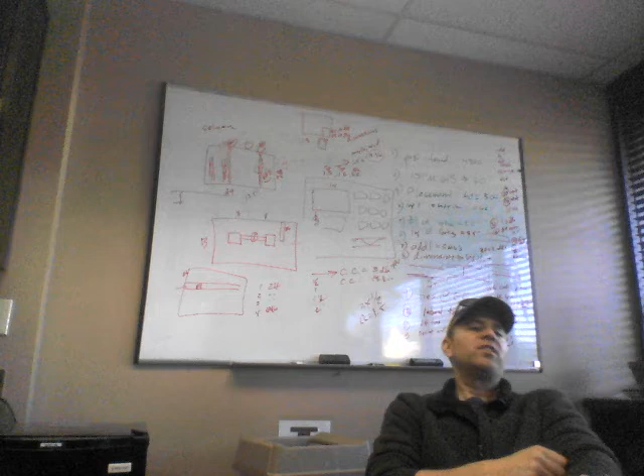Okay, I went and took the test on Friday. This is the second time that I took it. The first time I took it, it was more so to figure out how the technology worked, just a general thing, I wanted to know what was going on with it. I took it in 45 minutes and I was out of there.

This last time I took it, I really sat there and tried to remember all the questions. I took time to figure out what was up with each one of them. I went through the entire test 3 or 4 times and remembered everything. I wrote everything down on notes, so I had a visual imprint of it, so when we came back in to talk about it, I would remember.

But most importantly, when the test ended, I waved to the person to come over. I said, I'm done, and for them to shut off my test. And they're like, you have to take the survey. I said, I've done this test 30 times, I've tested in here so many times, you don't need to know my opinion anymore, I'm sure you'll be okay without it. She's like, no, you have to do it. I'm like, fine, and I just clicked right through it.

There's 12 questions. I didn't answer any of them, just clicked right through it. And a little screen popped up and it said test administrator score, and this all happened in less than a second. It goes 100%, and then the screen disappeared. So you can see it graded it real quick, and because I'd overloaded the system with all the clicks, it showed it on the screen instead of what probably in other instances would be a blip that nobody would see. It popped up there.

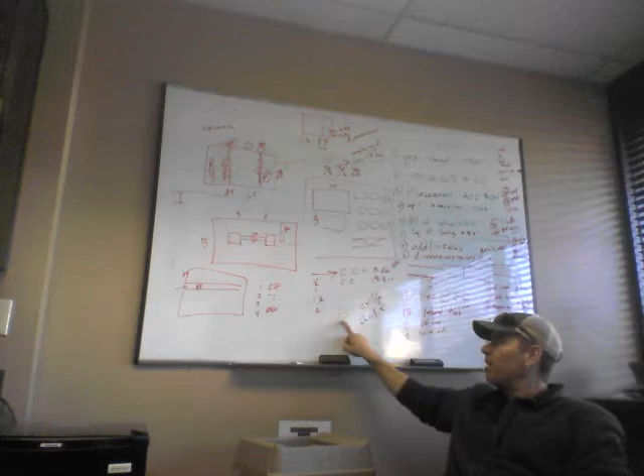Since we're video capturing this, I'll reiterate: remember when you pop up your exhibit screen, you can grab it from the top, move it down, look at your question, put it back, go down, put it back.

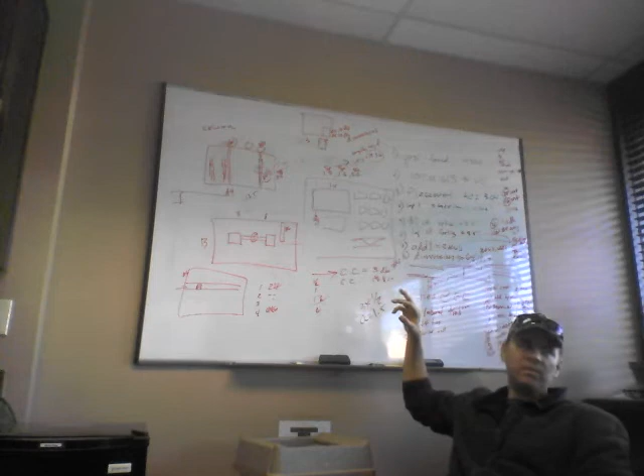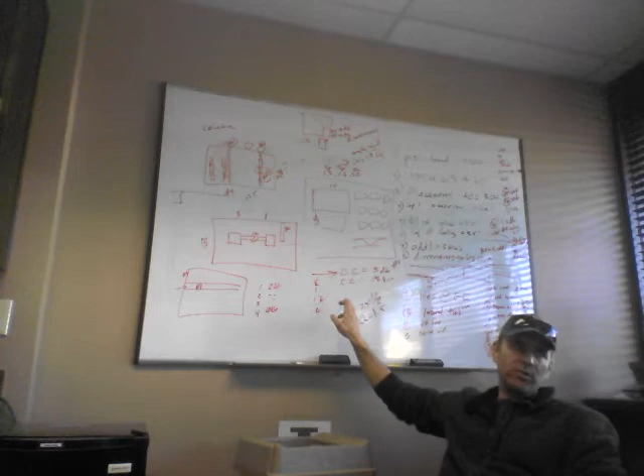The one thing I realized in this last test after doing the exhibit tutorial is that once you pop your exhibit up, if you hit enter, it makes the exhibit disappear. That was frustrating because you had to move the exhibit out of the way and click zoom or whatever. Now you can pop your exhibit up, and if you want to see the question, click enter, and the exhibit goes away. Between those two things, I was really able to cut through the technology portion of this very quickly.

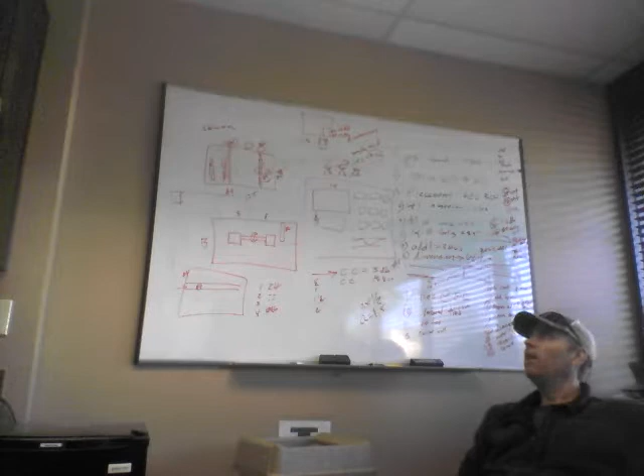That being said, the technology portion of this shouldn't be difficult in any way. What I think we discovered last time was that there are probably 6 or 7 questions we'll call booby-trapped, that we now know the right answers to if we get the same test next time. We can probably focus on those more than anything since we know the right answer to them.

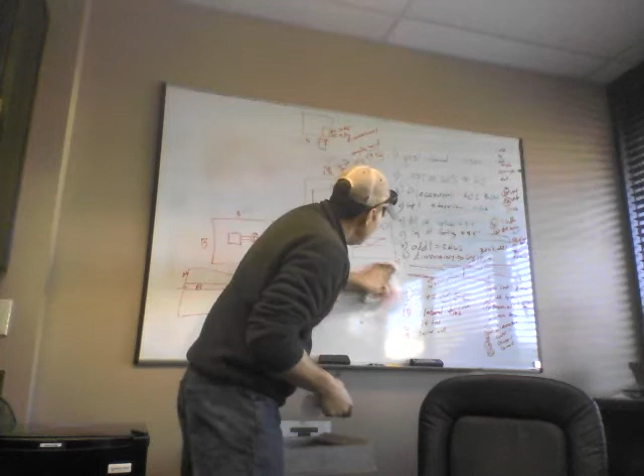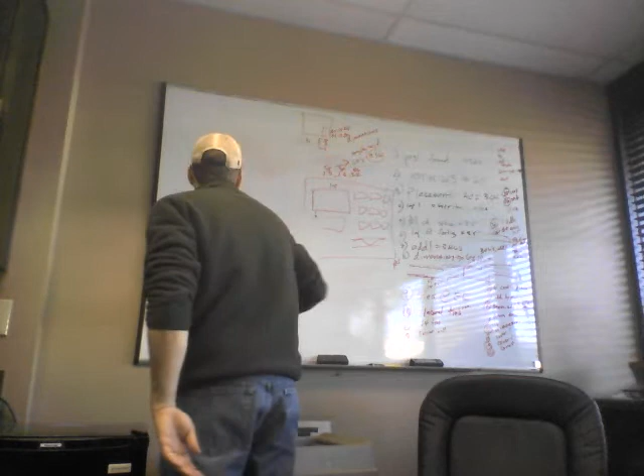Have you guys been taking it at the same place? I always take mine at SAC, Watt and Manlove, Cal Center Drive. I did Roseville the first time. If you do 8 a.m. at that one and you're there by 7:30, or 7:15, you'll be the first at the front door, because they don't open the doors till 7:30, so you can be the first one taking the test that day. I hate when there's a line of 90 people trying to cram in there and study. Well, I've been taking mine the same place, mine's in Sac too, but it's off like Gateway or something, that's the one I did. Gate Oaks, or Gate Oak something Parkway or something?

Yeah, yeah, why does my fucking computer always want to update?

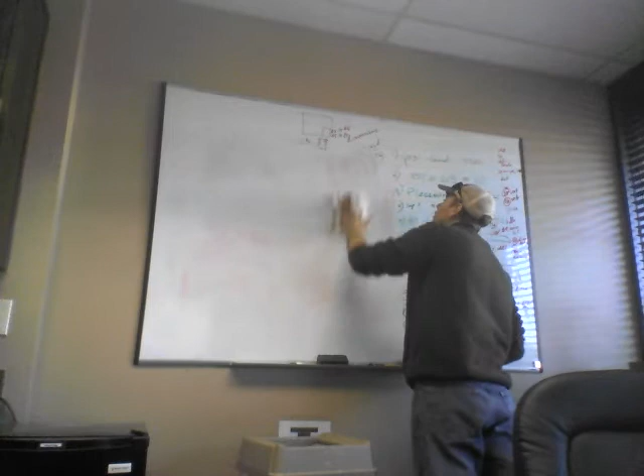Okay, so this test is 30 questions. They're in the bottom, go over here, other side, bottom right.

Okay, so, excuse me, we'll take it from the top. The general notes questions on this test - the first one asked what the required PSI of the concrete in foundations was. That was no harder than going to the general notes and seeing that it is 4,500 PSI.

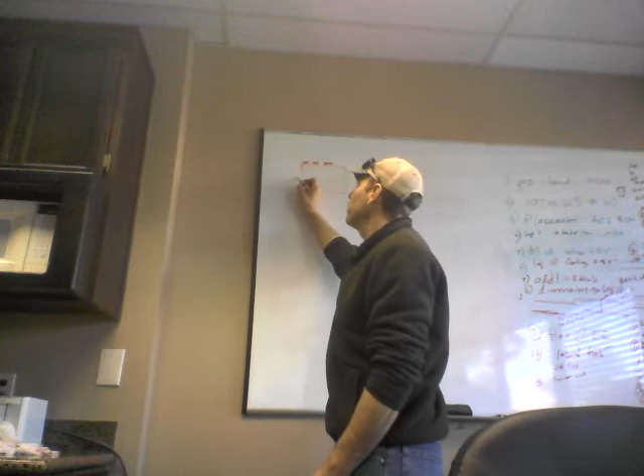The lap splice schedule requires you to know what PSI the concrete is to get your lap splice length. In this case, it asked for a cast in place wall. We go to our general notes and see the cast in place wall was 5,000 PSI, and we know we're dealing with a number 8 bar. So you go there to there.

But there's a couple tricky parts about this that make it a little extra complicated. One of them is they give you a tension development schedule right above it on the same page, so you've got to make sure you're dealing with the lap schedule, not the development schedule above.

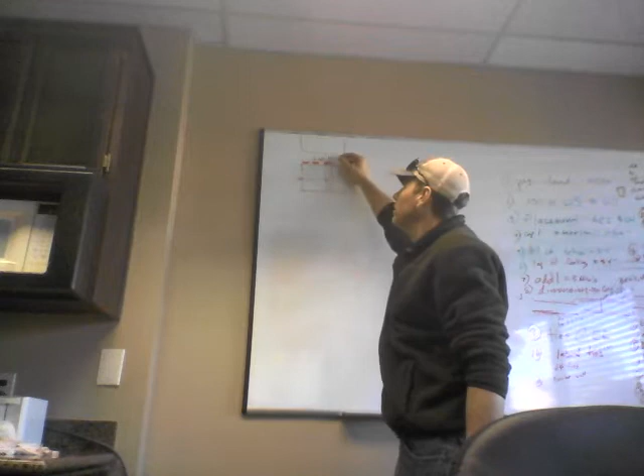And secondly, it breaks this into two numbers. It gives you top bar, and I think they call it other - I don't know if they call it bottom bar or other. Your inclination is to go spend a bunch of time figuring out what the top bar is and what the bottom bar is and whatever. But what you should notice is...

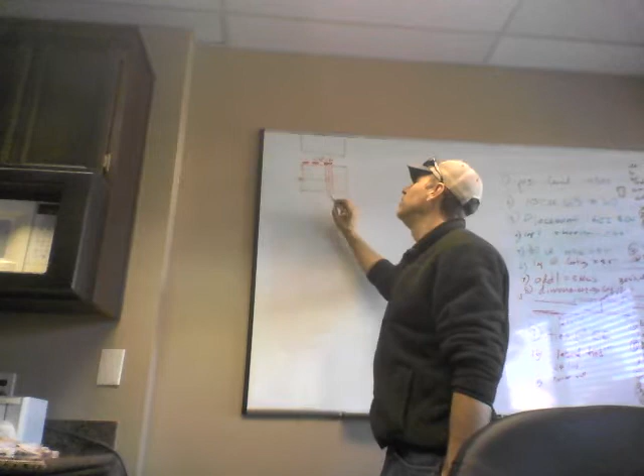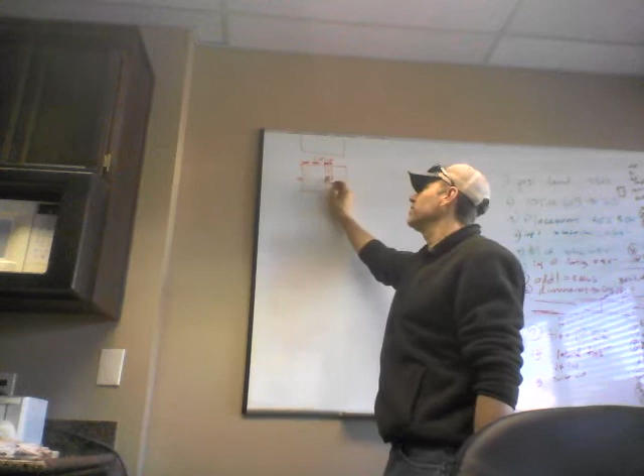...of your answers, only this one isn't your answer anyway, so it can't be the top bar. It has to be the other one, which I think was 62 inches. So you don't have to spend a bunch of time figuring out which is the top bar and which is the bottom bar. Just look at the choices you're given on your answer sheet and what is actually in this section. I think it was 62 inches, and you can answer it that way.

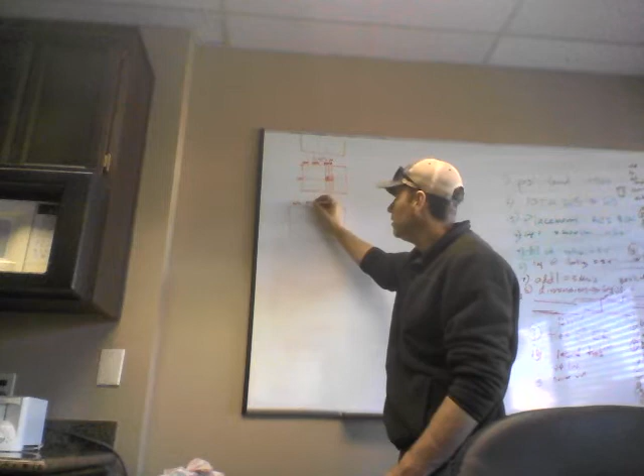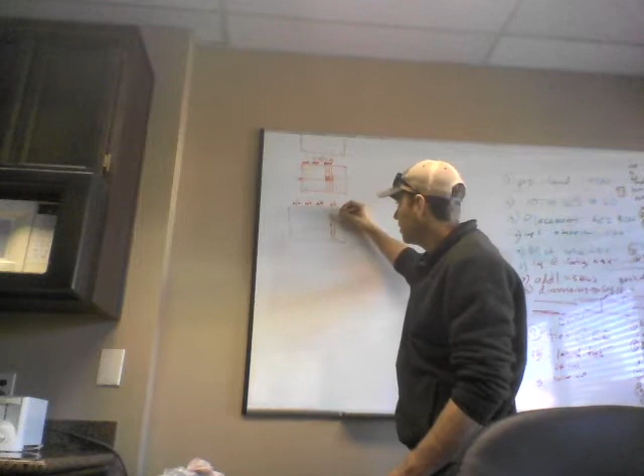Another lap splice question was, what is the required lap splice length in the vertical steel in the column at B11 on the second floor? Something like that. And what we're going to want to do to answer the column lap splice question is get the column schedule open. The column schedule gives you a number of locations, and it draws pictures of columns right there, showing how they lap and what the steel is at each of the different tiers - this is the fourth floor, this is the third floor, this is the second floor, this is whatever.

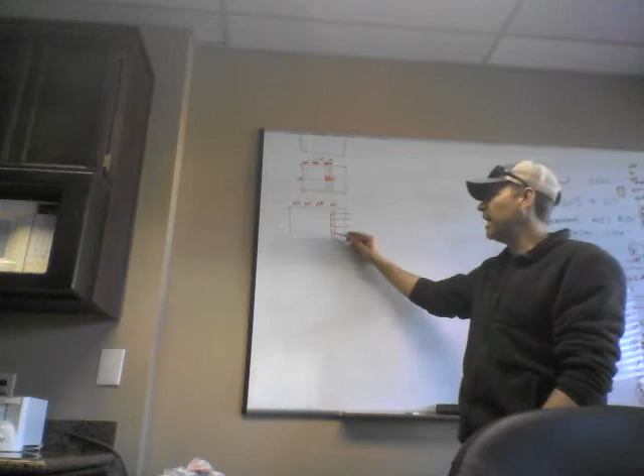Again, our inclination is to figure out what size the steel is and then go to a lap schedule, but that's not how you answer this one. If you notice the very far right of the page, it says number 9's lap at like 6'2", and number 11's lap at 8'5".

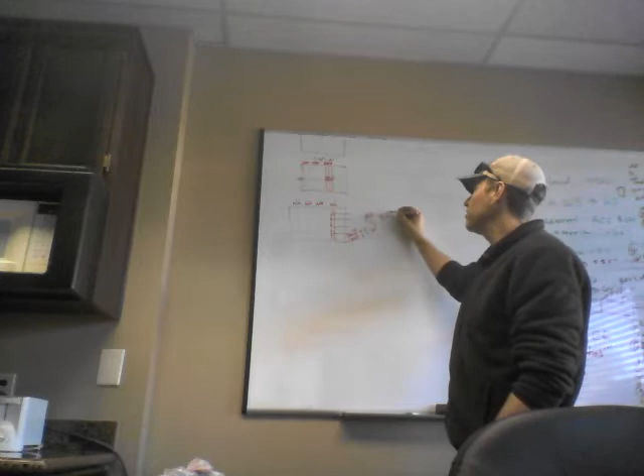You see really quickly that the kind of bars we're dealing with in column B4, whatever it was, are number 11's. You see that number 11's lap at 8'5", and your correct answer for that lap question is going to be 8'5". But the trick to this is make sure you scroll all the way down to the bottom right-hand corner of your page to pick up this little lap note.

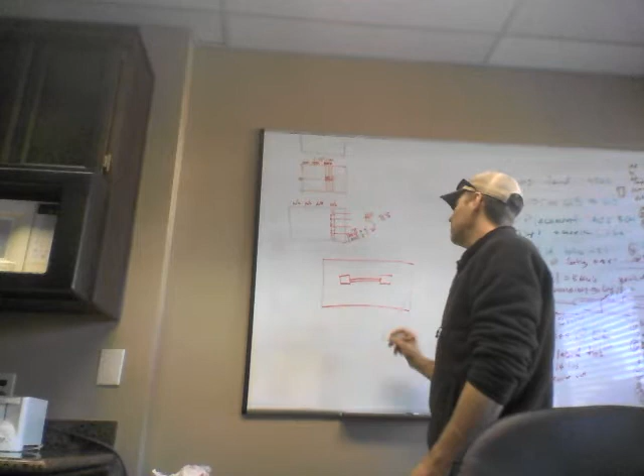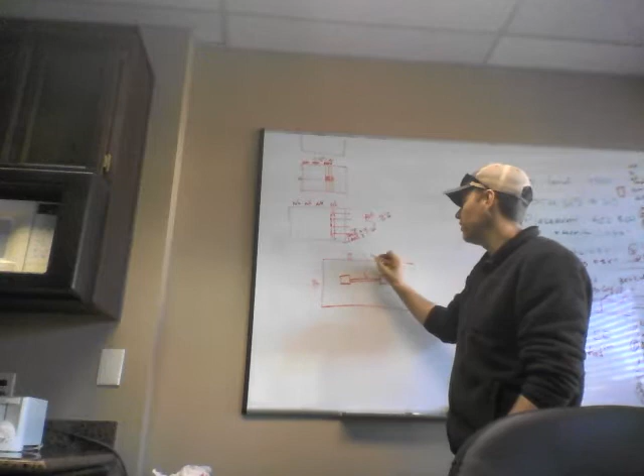The last lap question was - they give you a foundation plan, and I think there's a shear wall in the middle of the building. This is the footing for it. And it says, what is the required lap in the bottom reinforcing steel in the footing on B line between 8 and 11? Something like that, I forget, or it was like 5 and 8 or something. It said, what is the required lap in the reinforcing steel in this? And again, our inclination is to figure out what the steel is and go back to a schedule.

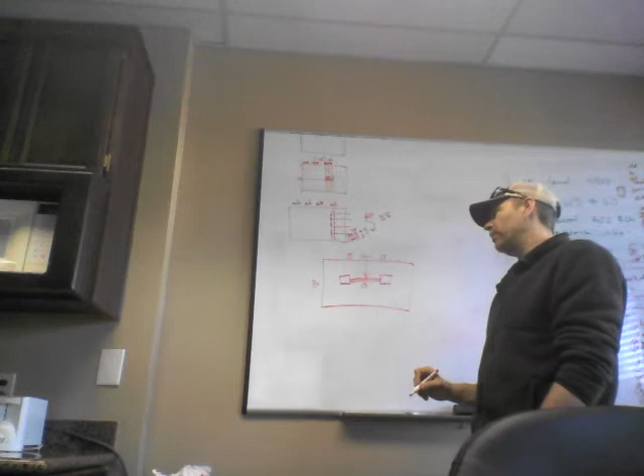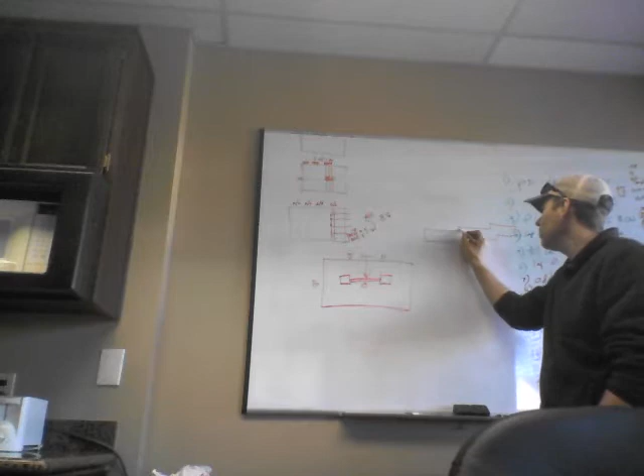But in this particular instance, there's a little elevation marker right there, and it turns that footing up to where we can see it like this. It is a stepped footing, and I think it's a shear wall footing, but I don't remember. You see the bottom steel, you see the top steel. I think they maybe show you some transition bars, something like that.

But there's a little note right here that says lap 8'5", and that's how you answer that question. So that thing is a cut right there? It's a cut, it's an elevation view. It flips the view up this way so you can see a sideways of it. And if you scour all the way around it, down on the bottom left, there's a little lap note, and you pick it up right there.

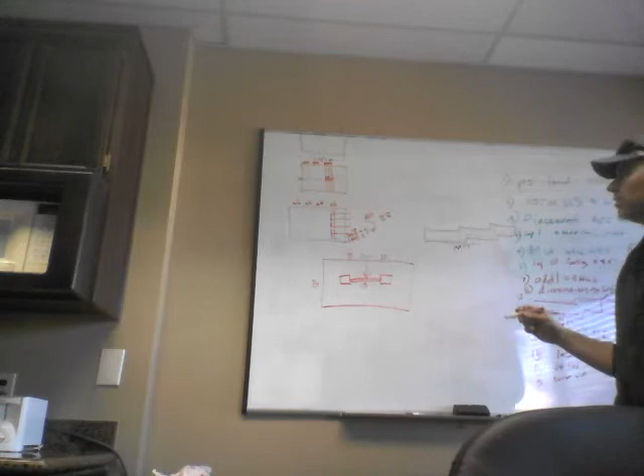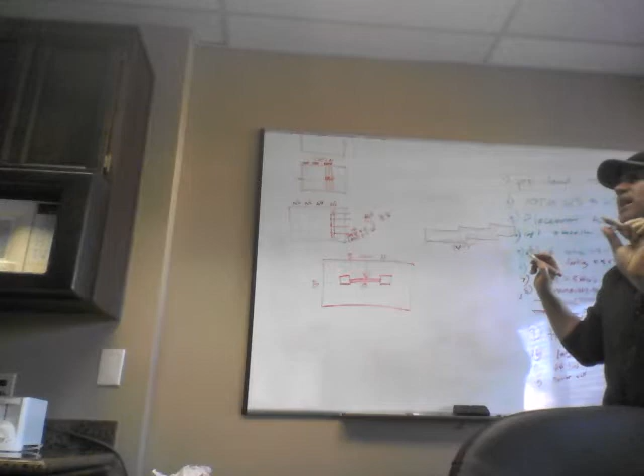They go back to this same shear wall footing numerous times in the test. One of the questions asked what is the required additional steel, I think this is the one that says the length. It says either what is the size and the length, or what is the size, and I think it's what is the size and the length. Well, that's another one.

An additional steel question refers you to this footing again. It says, what is the size of the additional steel at footing B between 8 and 11? You do the same thing, pull up the elevation, look at the side view, and it shows number 5s, and there's a little note that says ADDL, additional, like 3 number 6s. The answers are what is the additional steel: 3 number 6s, 4 number 4s, whatever, and the answer is 3 number 6s.

But while on this question, that made me remember another one. We'll call this question 28. It asks how long the bottom reinforcement in this footing is, between B8 to 9. So it gives you one section from here to here, and asks how long the bottom reinforcement is.

The way you figure this out is that the steel is identified down here. It's going to say number 5 at 16, number 5 by 14 feet at 16. If you don't realize that this X tells you how long it is, by 14 feet, you'll get it wrong. I think in this instance it was actually like 42, no it wasn't 42, I forget what it was. But it asks how long the bottom bars are, and you're looking for the X symbol because that tells you how long something is. That's another question you're going to get about this particular footing, we'll call that 28, length of bottom bars.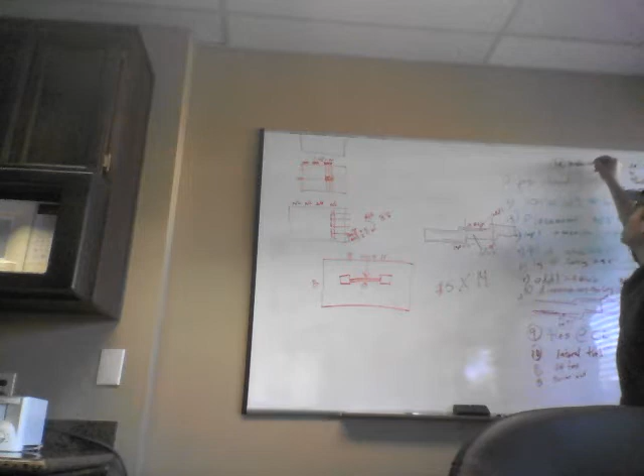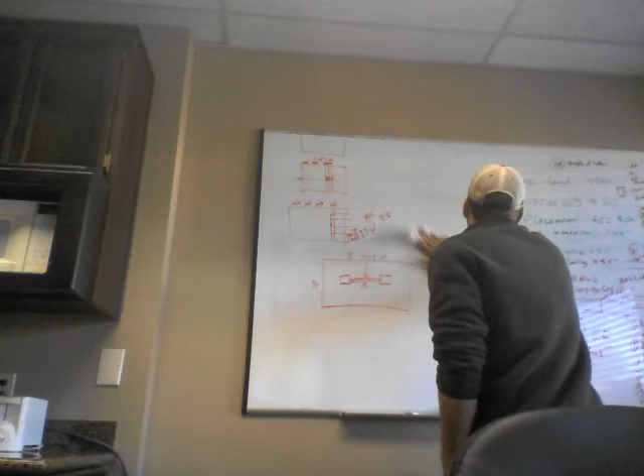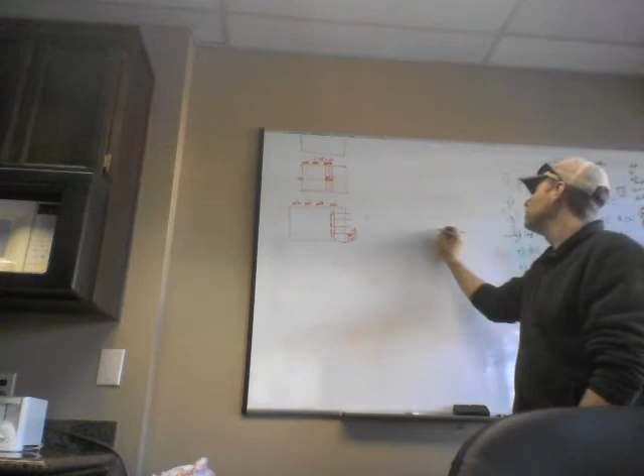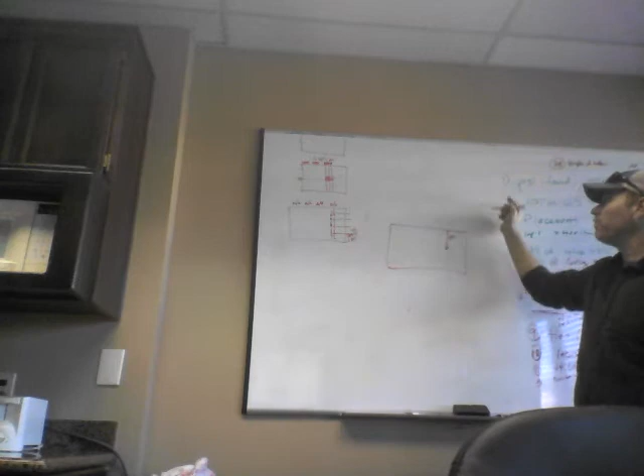We've talked about this at length already, but it came up on the test, so we'll do it again. It's going to give you a framing plan and ask about a beam from here to here, and say what is the tie spacing at each end of this beam? This beam is a PG1, we'll say. Obviously one of the other pages they give you is your beam schedule.

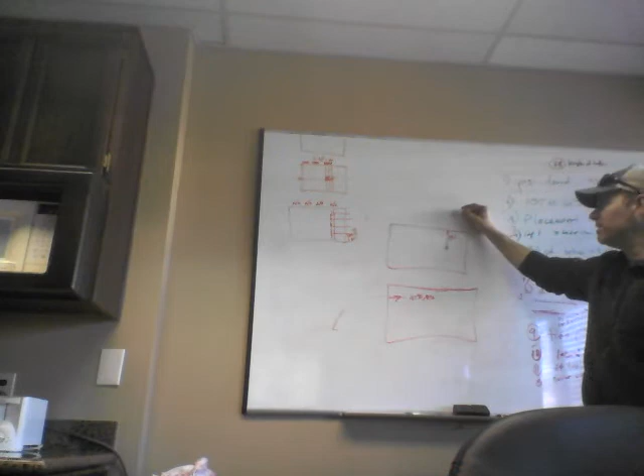You go to the beam schedule, and basically you go to PG1. I think it says it right there. It's like 1 at 3 each end, 1 at 3, 4 at 6, blah blah blah. You just correlate that right back to the answers they give you. It's just that easy, there was nothing difficult about it. The only thing you need to know is EE means each end. If you're not able to figure that much out, you might get that question wrong.

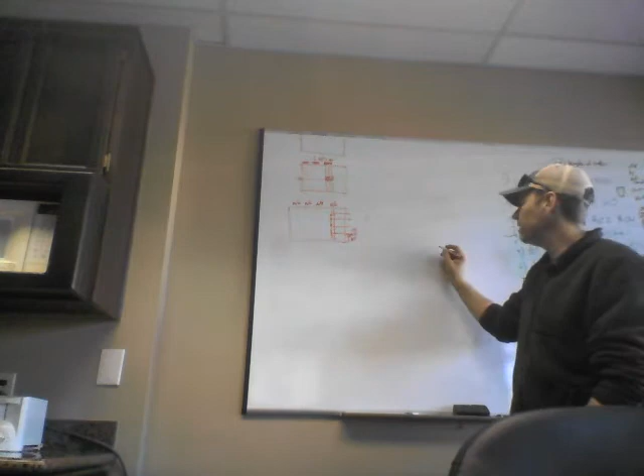Lateral column ties. What was the lateral column ties about? Okay, that one, all right. So you may remember we did this question before, where it's going to say the column at B4 between the 8th and the 9th level has how many closed and how many cross ties.

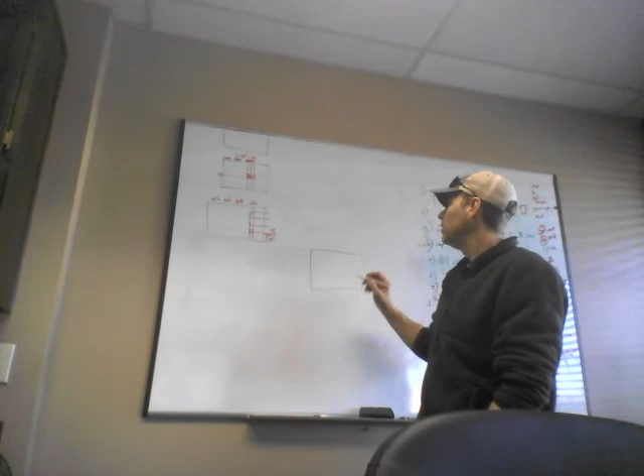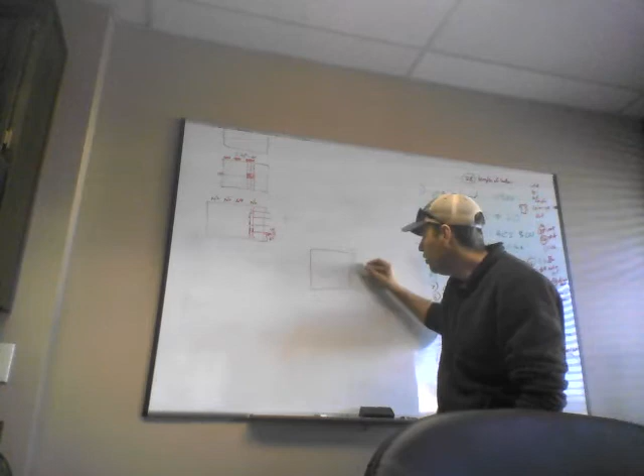What you have to do is go to B4 in the column schedule. Column schedule is going to have a column right here, B4, and there's a little note on the side that says, for ties, go to 12 on S5.1. Cool, we know the tie spacing for this column is 12 on S5.1. You go to 5.1, and it's got your sheet like this, with all these cut views of every different column type. This one has circular ties, this one has a closed tie and a cross tie, this one has whatever whatever.

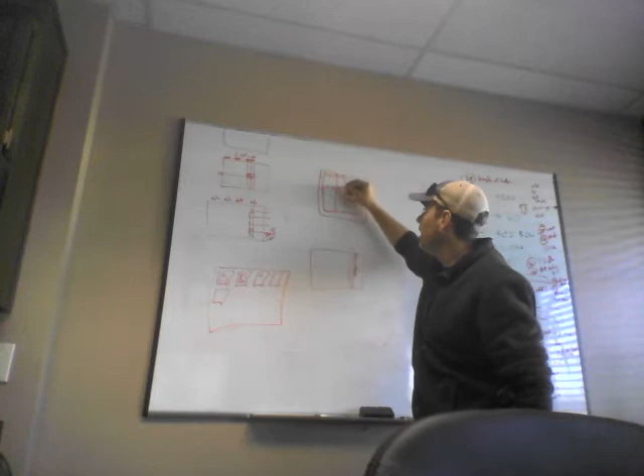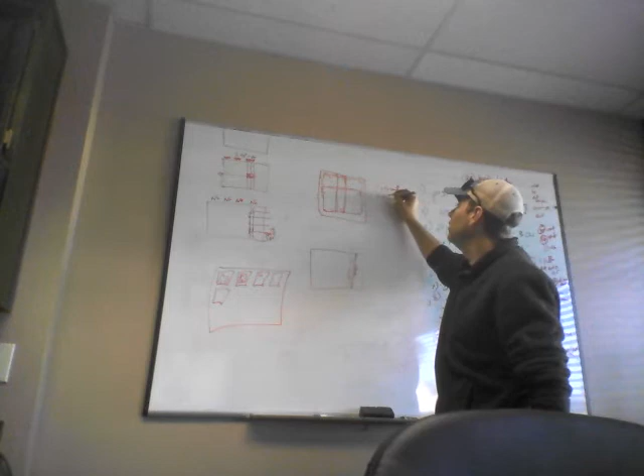Well, we get to our picture, and it's a column, 1, 2, 3, like that, like that. It's got the closed tie. It's got a cross tie, a cross tie, a cross tie. It's got them going the opposite direction like this. And the picture becomes muddled because these are all on top of each other. Your choices are 1 closed, 2 closed; 1 closed and 3 cross; 1 closed and 4 cross. I think there might even be another one right there.

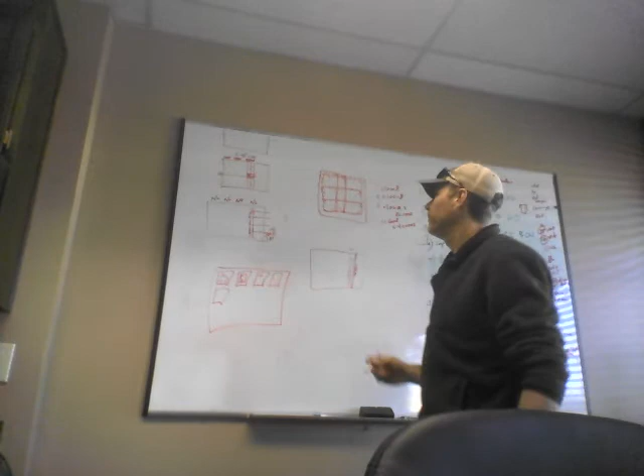And what's the answer? One closed and 4 cross, that's what I thought the first time, but I took extra time the second time to figure it out. On my second test, it actually was like this, and that's what made me realize I got it wrong the first time. It would have been 5, but 5 wasn't an option.

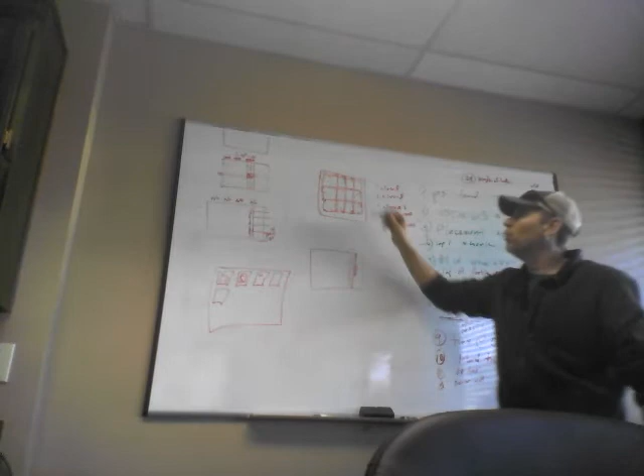1 closed, 1, 2, 3, 4, 5 cross. I was sitting there going, it's impossible, you can't. And then I realized it didn't.

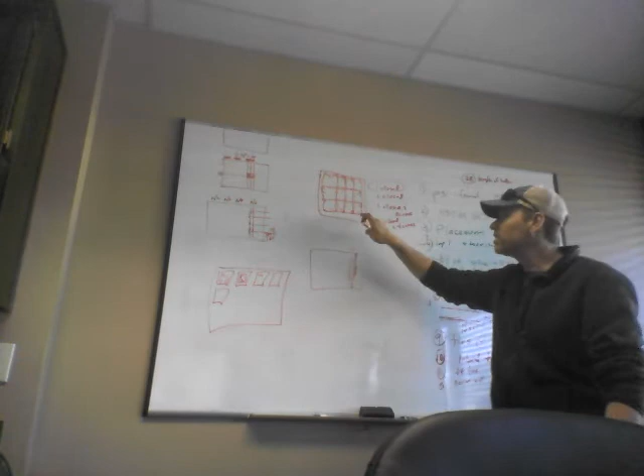The right answer isn't here. What is the best answer? What's the only thing we know for sure? Was the 1 closed. Right, it's BS, but that is what it is. So anyways, when you get to this one, you don't have to waste too much time on it. At least in the test that I got, the question I got, it was 1 closed.

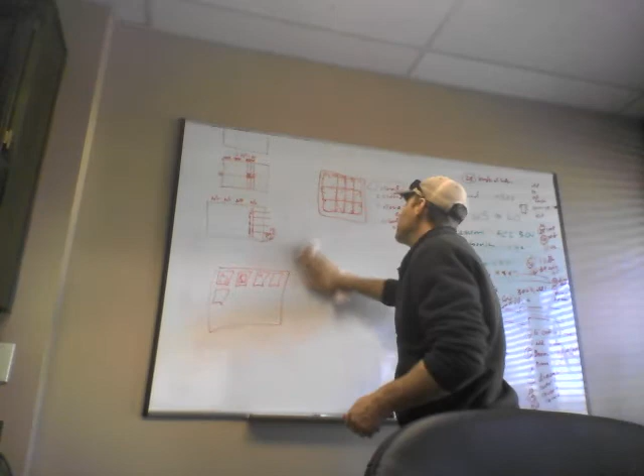Okay, on that note, another tricky one about this was it asked you what size ties exist in the column at B2, at level 3 to 4, whatever it was. What size ties?

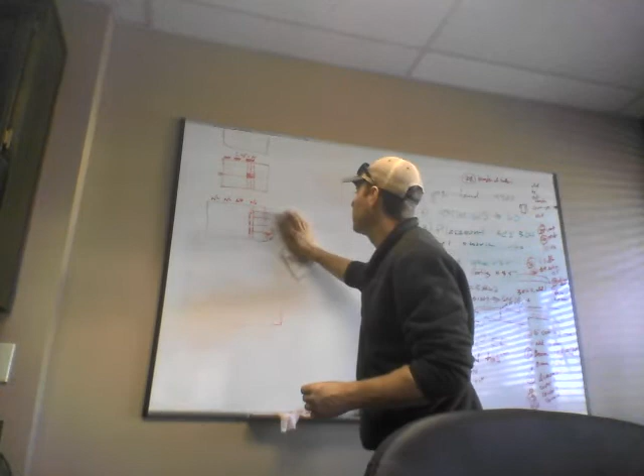And it gives you 2 sheets that have nothing to do with the question they asked you. In this particular test, this question was blown. They did not give you the right sheets for it. I had to go back to a previous question, pull up the column schedule. It was not there. I had to pull up the lateral tie schedule,

which I just happened across later in the test. And the lateral tie schedule, which is the one that has all the pictures of the ties, right here, was a picture of a column in its typical layout. And there was a little note to the side that said, for number 11 bars, use number 4 ties. For number 9 bars, use number 3 ties. Once I saw that, I was able to answer two or so questions based on that.

But what the question asked you was, at the B2 column, between here and here, what size ties does it get? Well, you see that there are number 11 bars up here in this column. You see the number 11 bars get number 4 ties. You go there, you choose number 4, and it's as simple as that.

Wait, can you repeat that? Okay, we'll go through it one more time.

The question is going to ask you, what size ties are in the B2 column between levels 3 and 4? Something like that, I forget exactly where it asked, but it's going to point to a column and ask what size ties are right there. On my test, they did not give you the right sheets to answer the question from. So I had to go and dig through other questions to pull the sheets out that I needed.

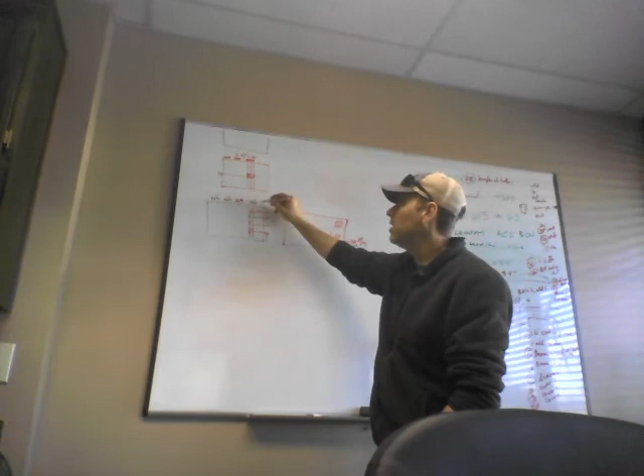Once I did, my first inclination was to go to the column schedule and try to find it right here. There's got to be a note on here that says what size ties there are. There isn't, but it tells you to go to 12 on S5.1 for ties. So you go to 12 on S5.1 and here's your ties.

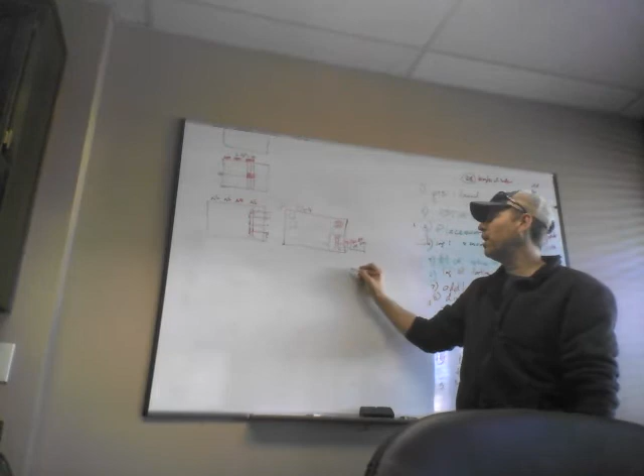If you scroll all the way over to the right, there's this little diagram, and even further to the right, there's this little box that says, for number 11 vertical steel, use number 4 ties. For number 9 vertical steel, use number 3 ties. So it's just a note in the corner. That was how you had to get that one. Yeah.

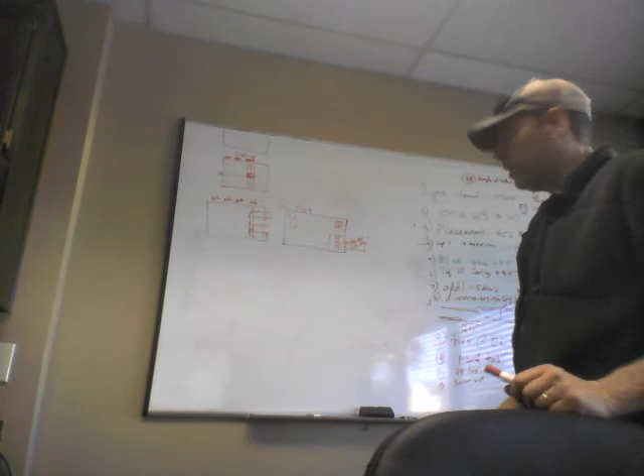All right. Let me see how much time we have on this. We're 24 minutes in. Perfect.

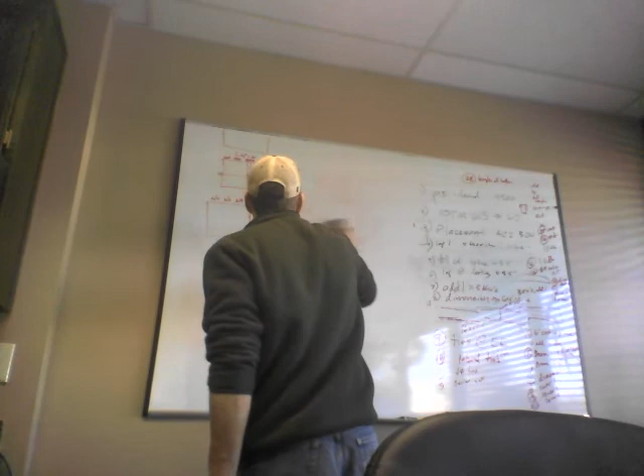Okay, you get 2 questions related to the barrier wall, we'll call it. You have a foundation plan. It's going to say the concrete wall on line A between 5 and 6 has what reinforcing steel in it? And there's a bunch of business going on in here, a bunch of this and that and this and that. It's kind of hard to tell what's what from this view. It gives you a couple cuts though, and obviously we go to the cuts and we see what we got.

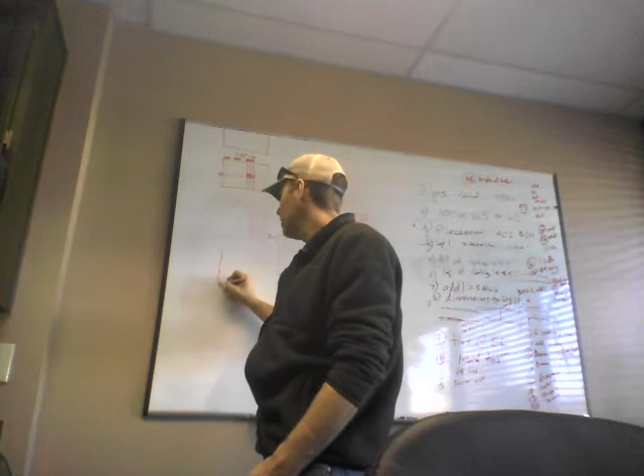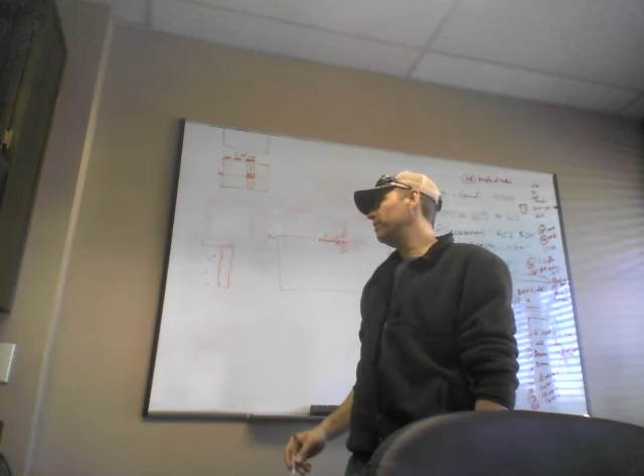You go to this cut and it's going to show you the wall is going to be a masonry retaining wall with a concrete slab on top of it and a small concrete wall on top of it. It asks you what the reinforcing steel in the concrete wall is. And what we have to be careful of is to not mistake this CMU wall for the wall they're talking about. They're talking about this one right here. This one right here has a little note that says number 5 at 16 inches vertical, or whatever the question asked you.

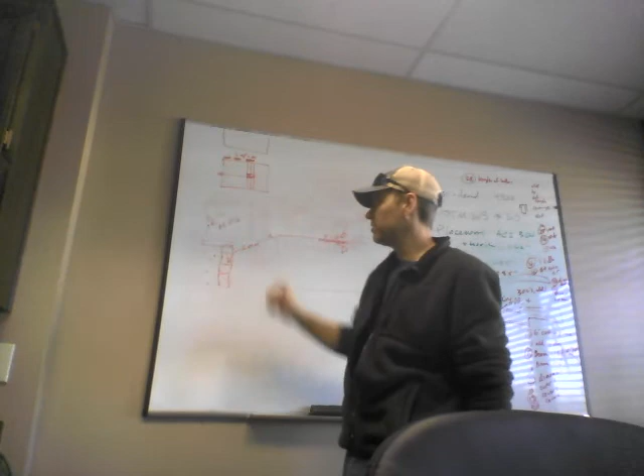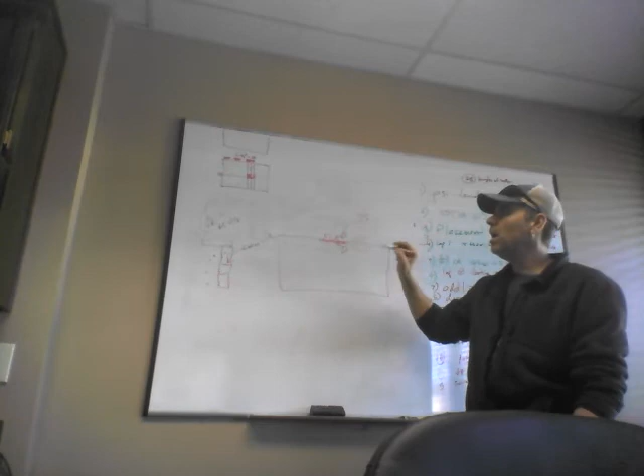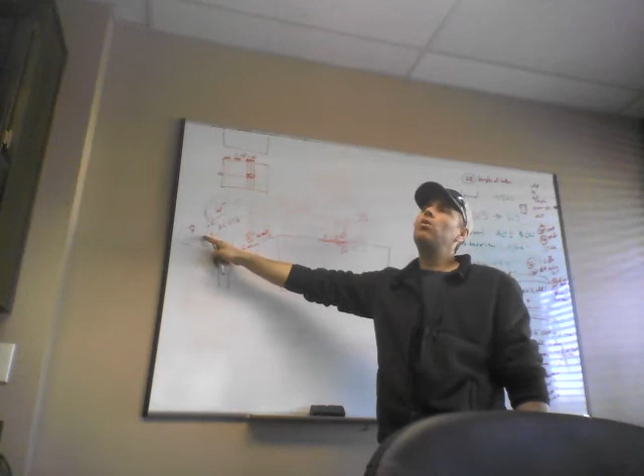Later on in the test, it's going to send you back to this same area, A5 to 6. This section is going to ask how thick this wall is. There's a little note that pops out that says 8-inch wall first, but you have to remember that's not the wall they're asking about. It asks the thickness of the wall on A line between 5 and 6, the cast-in-place wall, and that wall is actually 6 inches. You have to make sure you pick the right wall.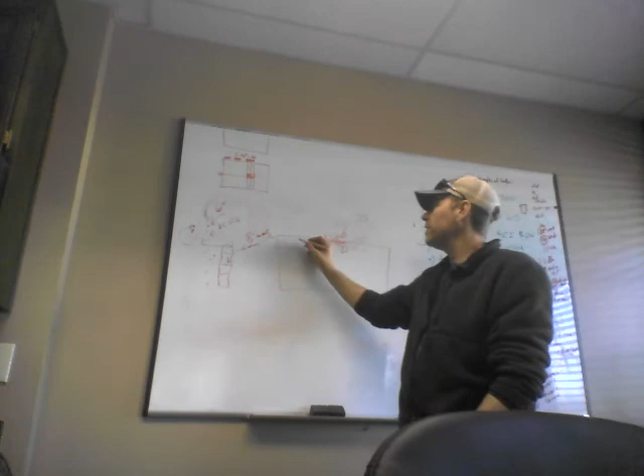They'll give you a question that says the added reinforcing steel south of the elevator on the 4th tier is what. You find the elevator, and you see it's got a lot of business going on around it.

The only tricky thing is figuring out what is the added steel and what is south versus north. Remember, if you don't scroll all the way down to the right corner and see that your compass is turned sideways, you might assume this is south, but it's not. This is actually south. The reinforcing steel bars have a little note that says add number 3 at 6 inches, something like that. These are the bars you're looking for, right here.

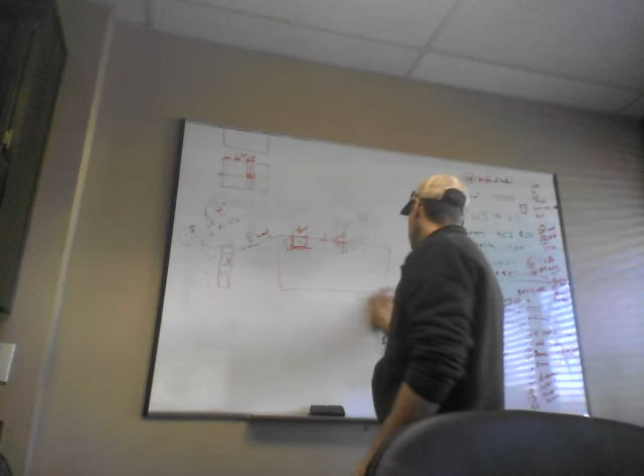The slab steel you'll be asked about - this building exists as a series of beams running this to this, column, this to this, concrete beams. On top of these beams is reinforcing steel. In between the beams, on the bottom of the slab, is reinforcing steel.

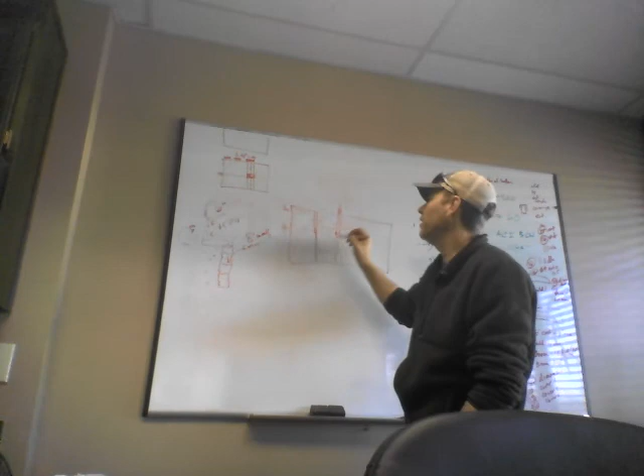What they'll do is ask you what is the size and the spacing of the reinforcing steel on the beam between A and B on 6 line. So you just go here, grab that bar, and figure out what size, what length, what spacing that bar is. Simple.

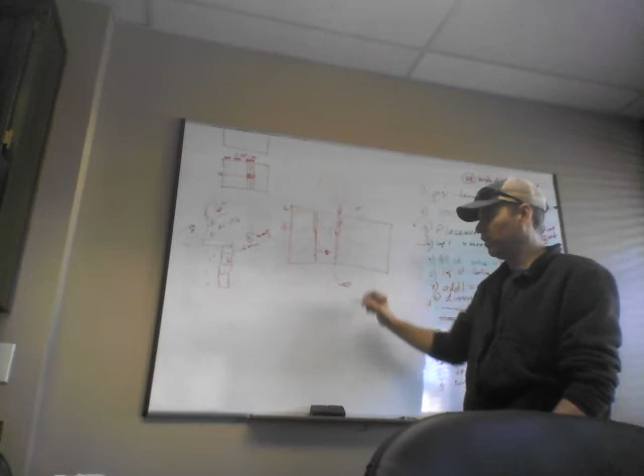It's going to do the same thing - it'll ask you about the bottom reinforcing steel in the slab. It's no harder than figuring out that's the bottom reinforcing steel, then going to figure out the size, the spacing, and the length. Those are two pretty easy questions.

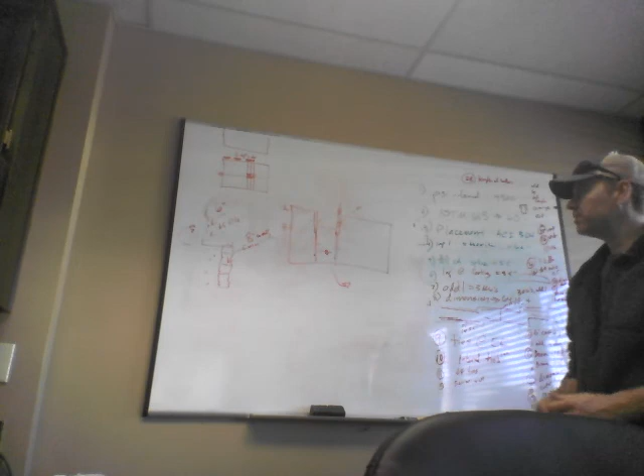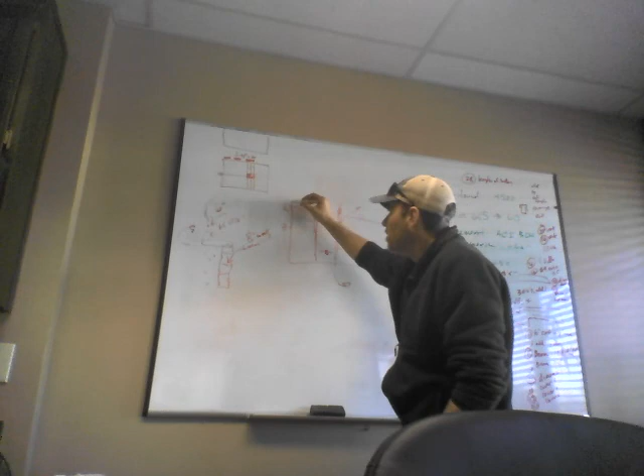You're going to get 3-dimensional questions. One of them asks the length of the beam, the width of the beam, and the depth of the beam. It's going to give you B6, saying the beam between A and B on 6 line. You pick up the length of it from over here - the length is going to be 64 foot 10 inches.

Remember, the hash marks this way show you what is being measured. There's a number of other things being measured in the intermediate space between this, so you can't let that distract you. Disregard this and look for your here-to-here measurement. You're going to pull your 64'10". Once you get that, it's easy peasy.

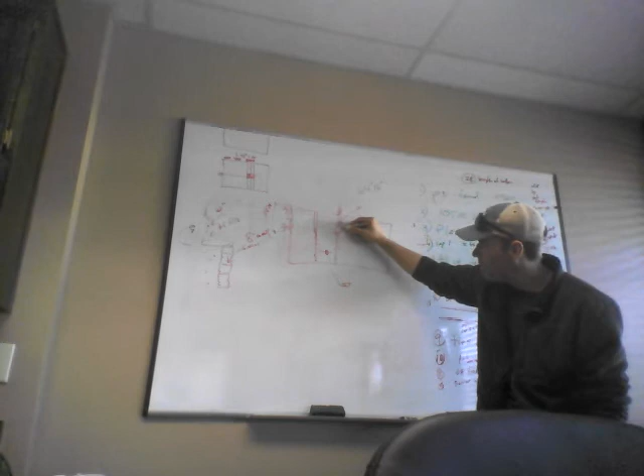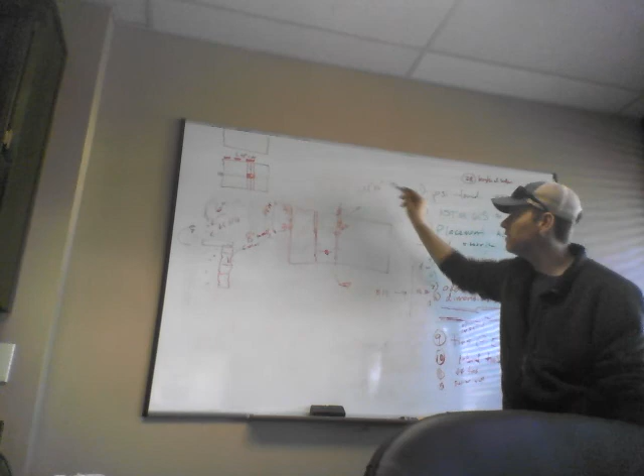You figure out that the beam right here is a B12. You go to the B12 on the schedule. It says depth, width - 18 inches width, 16 inches... wait, 64'10", 18 inches, 36 inches, done.

They'll give you another dimensional question which just asks the width and the depth of some beam somewhere, I forget what it is. So you grab it and go to your schedule.

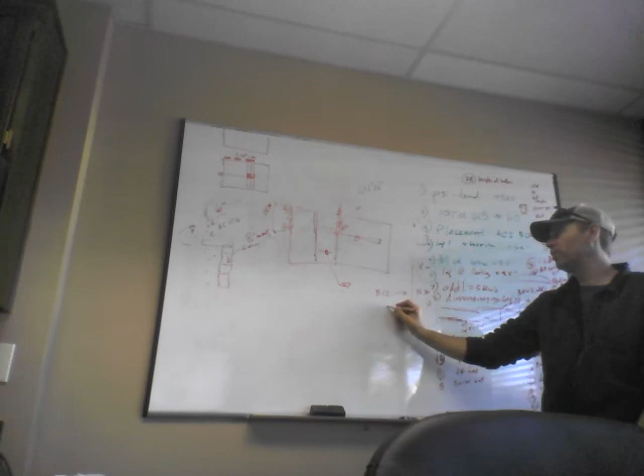This one's going to be a P. Remember, the post-tension beams have a P - the PG beams are a post-tension girder, their beams are just Bs. It'll be a P7 width, P7 depth. Done, easy.

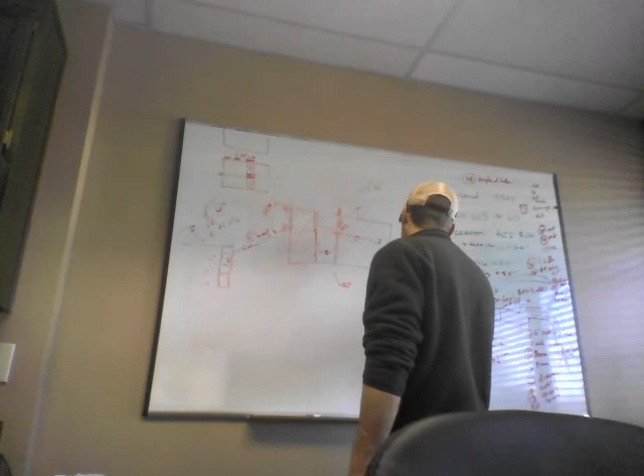The other dimensional one you get is back at this footing in the foundation. I'm pretty sure that's where it was, and this was the only one that was even moderately tricky, and it wasn't that tricky.

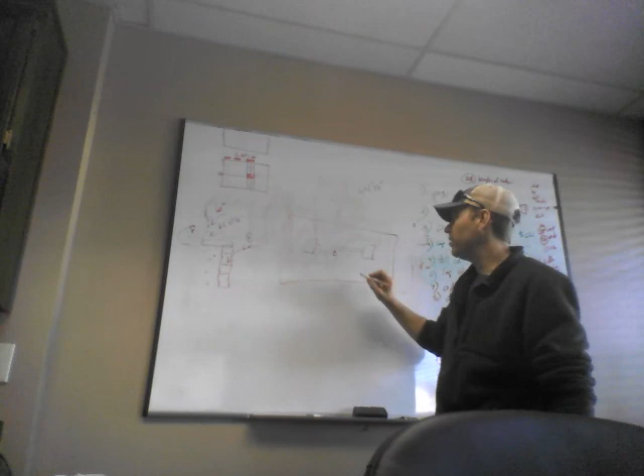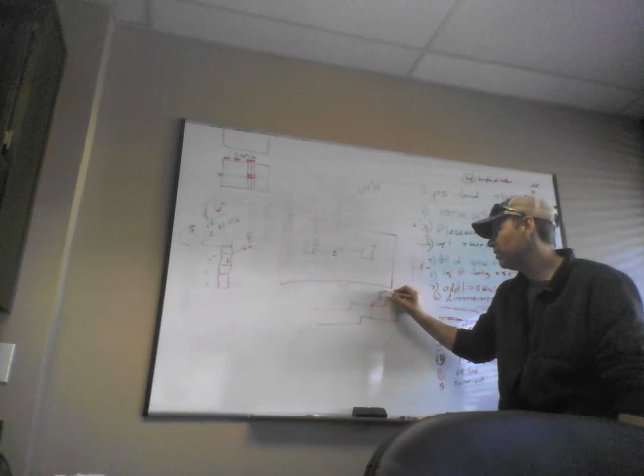Remember, the footing for the shear wall at the foundation has the big end - it goes like this and like this. I think it asks what the dimensions of this footing are. Remember, you have your little elevation view right here. You look at that elevation view, it turns on its side, and I'm pretty sure you answer this with this little cut that goes like this, and it says W18, D36, something like that. That's how you pick up the dimensions on that one. I'm pretty sure that's how that went.